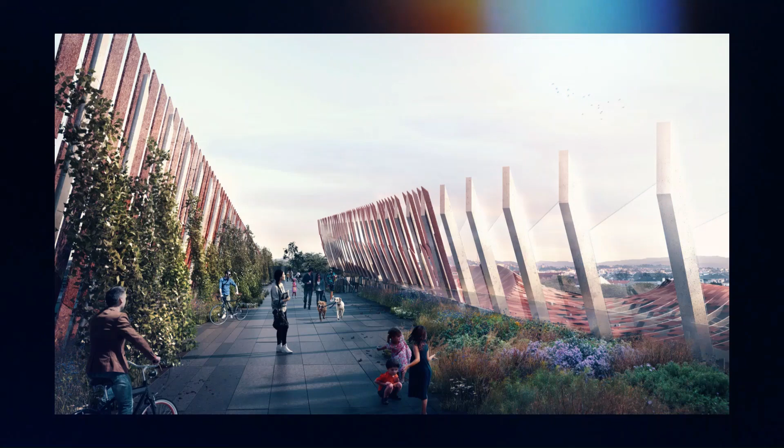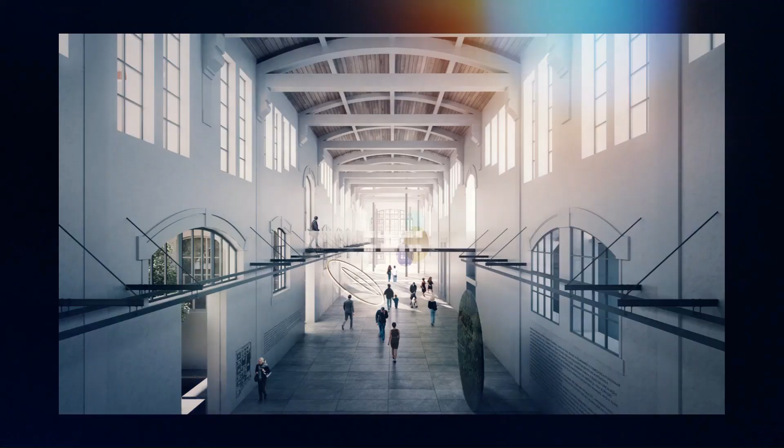The scheme seeks to reconnect the previously important structure with the city center, through interventions such as a bridge linking the site with a nearby metro station. Meanwhile, a vernacular roof stretching across the entire site unites old and new, under which sits a museum, library, performance space, art archive, and creative laboratory.

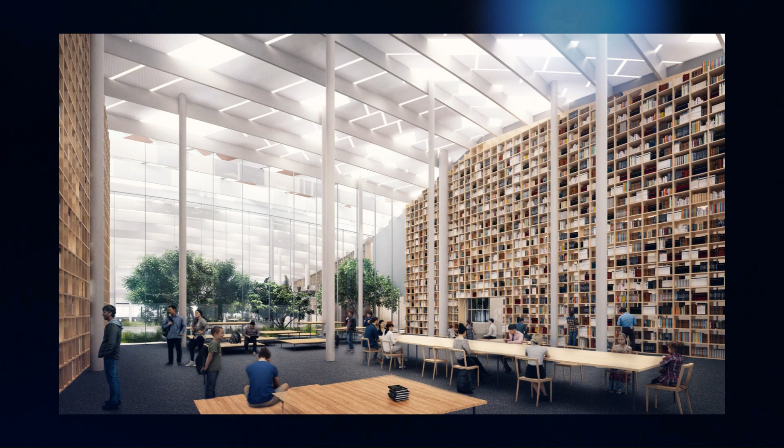Project description from the architects. For the new Porto Slaughterhouse project, we are interested in creating a building rooted in local history and memory, and to develop a sensory translation of the public space that will belong to everyone, while each visitor feels as though the space is their own.

During its prosperous years, the former Porto Slaughterhouse was considered one of the most important economic and development engines for the Campanhã area. However, in the late 1990s it was closed and has remained virtually unoccupied since. Major developments around the site, such as the FC Porto Stadium or the nearby Speedway and heavily trafficked city exit route, separated the complex from the city. The Matadouro was lost and forgotten among the surrounding urban elements.

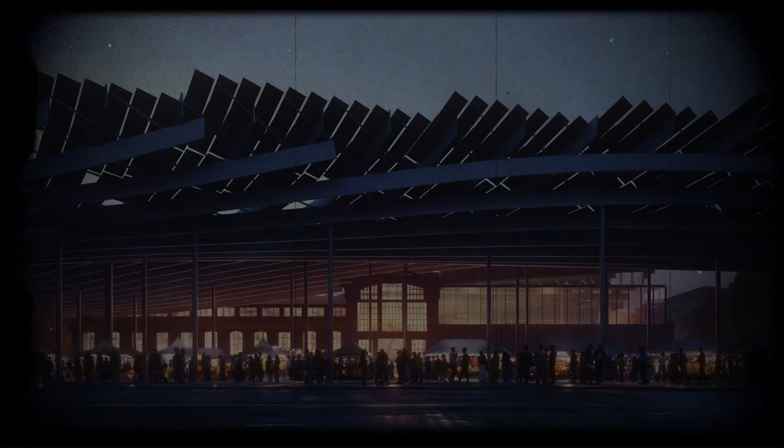With this proposal, we intend to reactivate, reinvent, and engage the local history and memory of the city. In order to achieve this goal, it is essential to create a structure that will have a strong presence from afar while also reinventing the square underneath, for neighborhood uses and new functions, to re-establish the site's importance in the city's cultural, business, and social network.

The urban approach. The brief required a new bridge to establish a connection to the upper side of the city and metro station, once the site is located at a lower level and isolated by the Speedway VCI. This created the opportunity not only to access the site itself but also to the neighborhood living in the south area to access easily other parts of the city. The site became part of a path and exchange, a new anchor to the city.

On the north, the access is made by the building bridge on its top, creating the uplifted plaza that serves as a public garden and belvedere for the whole project and the city. And on the south, at the level of street and local neighborhood, two other squares would generate another entrance, spots for any social events and interactions.

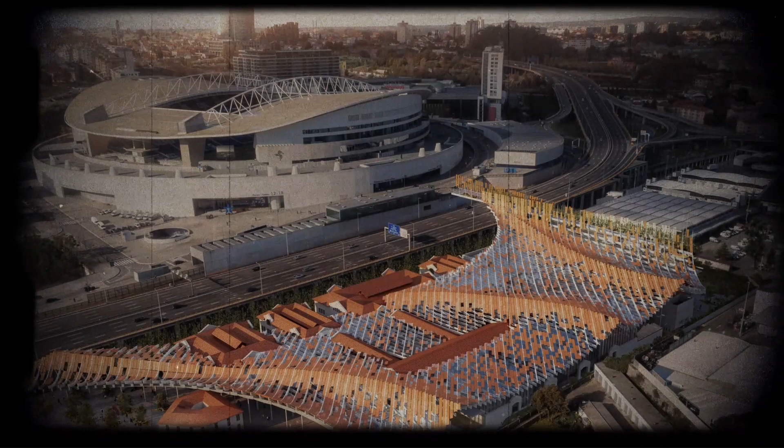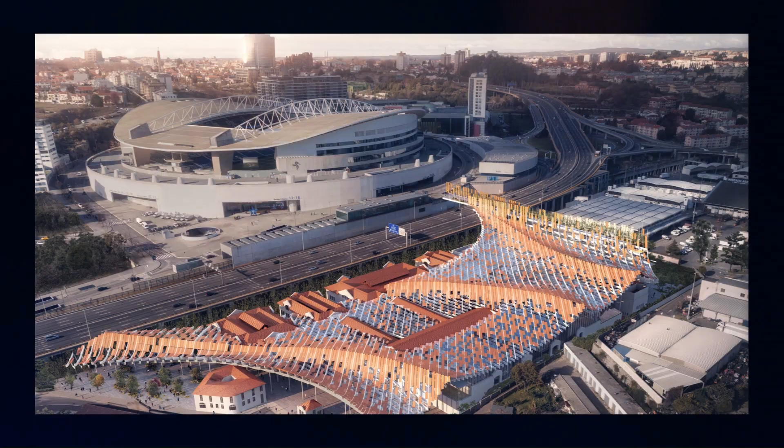The form: one gesture that unites. The roof stretches across the entire site to integrate all the program underneath, uniting old and new, while preserving the historical heritage. It covers or integrates with the existing building structures according to necessity. It establishes a dialogue of scale with the large adjacent infrastructures and subtly blurs through the material with the House of Campanhã. With a simple gesture of accentuating by the ridge, the specific program underneath is revealed and connected as two front plazas for cultural programs, library, museum, performance space, etc., or a new bridge connection with the neighborhood.

The roof, traditional materiality. The aim for us is to use knowledge and materials known locally, however showing their new potential. The ceramic tiles as main covering roof members integrate the new architecture with typical neighborhood appearance, and glass panels bring the light, cover from environmental factors as rain or sun, or glow with warm light as a lantern for the district during the night hours, providing a safe cross passage.

Further, as Porto is renowned for its warm summers with excessive sun and, on the contrary, rainy weather during the other time of the year, the new roof appears as a second skin, allowing the site to be used all year round, ensuring protection and shading, thus enhancing the wind to pass through. Although it is an innovative design, the whole refers to both local construction and also its form, trying to refer to the lightness of the existing big open structures, thus large thin members that levitate, weaving as a textile.